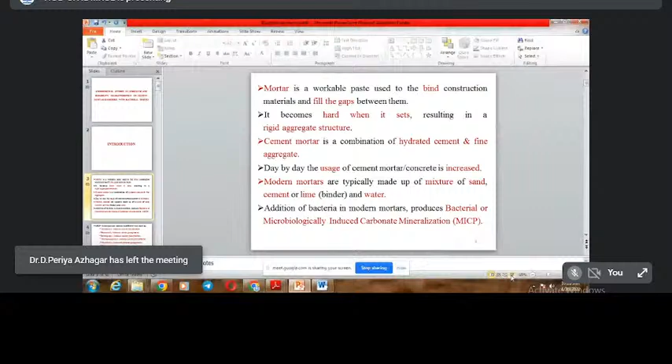Hello madam, now sir, now it's okay, it's coming. Okay madam.

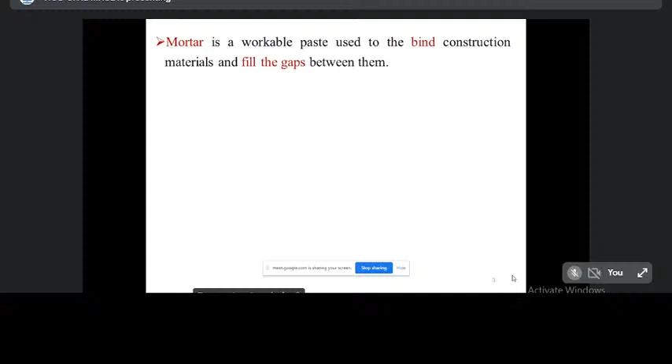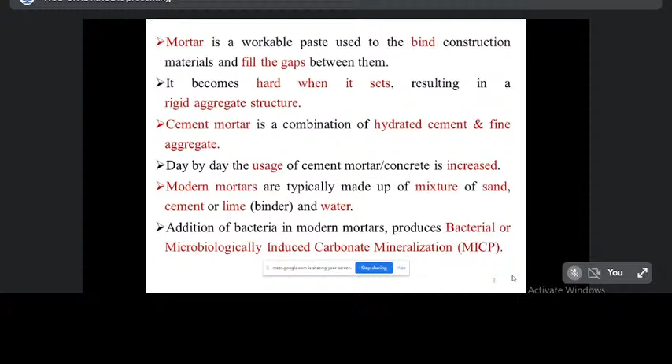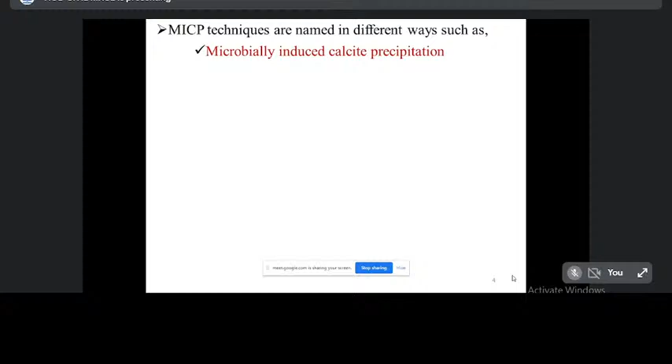The bacteria is added into the cement mortar. It produces microbially induced carbonate mineralization, called MICP. This MICP is called by different names: microbially induced, bacterially induced, microbiologically induced calcite precipitation.

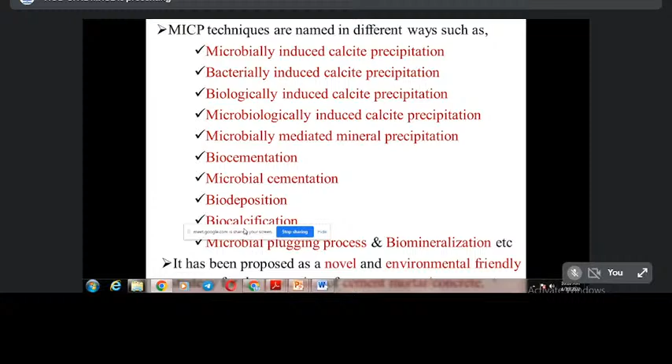Microbially mediated mineral precipitation, biocementation, microbial cementation, biodeposition, biocalcification, microbial plugging process, and biomineralization, among others. The bacteria is introduced in cement mortar, producing MICP, which is called by different names. It has been proposed as a novel and environmentally friendly strategy for the production of cement mortar and concrete.

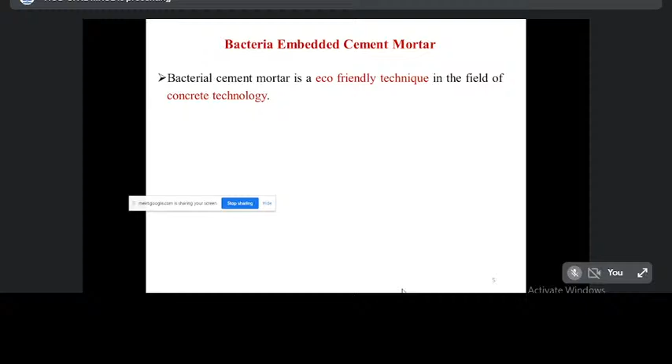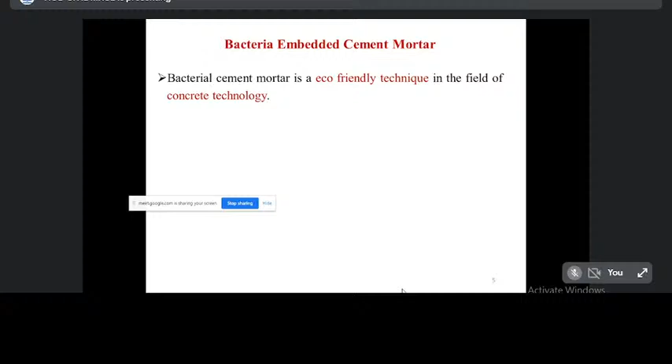What is bacteria embedded cement mortar? Ordinary cement mortar is the mixture of cement and sand with water. In addition to this, we add some bacteria into the cement mortar through the mixing process as well as the curing process. These bacteria produce carbonate, and that cement mortar is called bacteria embedded cement mortar.

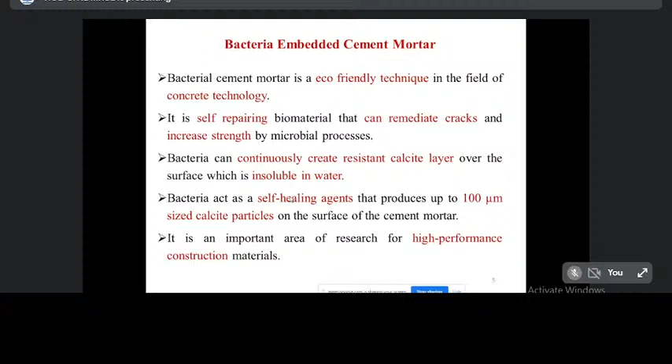The bacteria produce some calcium carbonate that fills the voids between the cement and sand matrix, so automatically the strength and durability characteristics of the cement mortar increase. Bacteria can continuously create a resistant calcite layer over the surface which is insoluble in water. Bacteria act as a self-healing agent that produces up to 100 micrometer sized calcite particles on the surface of the cement mortar. It is an important area of research for high performance construction material.

Then we move to materials, methods, and instrumentation. Materials are nothing but cement and sand. First, Portland Pozzolana cement with brand name ACC was used in this study. It conforms to IS 1489-1991 with specific gravity of 3.1. The photo view shows the ACC cement.

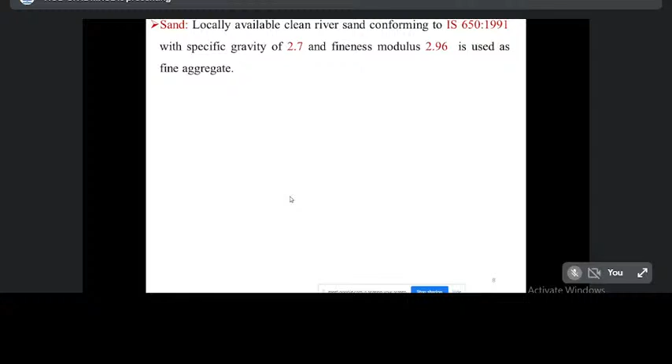The next material is sand. Locally available clean river sand conforming to IS 650-1991, with specific gravity of 2.7 and fineness modulus of 2.96, is used as fine aggregate. I have used 3 types of sand, conforming to Indian standard sand conformation. That means the sand is passed through 2.36mm sieve and retained on 1.18mm.

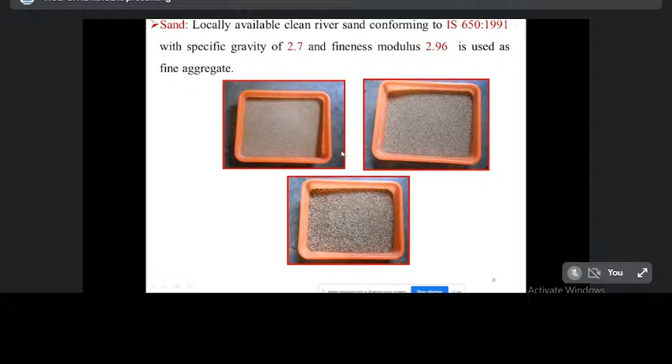Then 1.18mm passed, 700 micron retained sand. Then 700 micron passed, 90 micron retained sand. So 3 varieties of sand: coarse, medium, and fine sand. These 3 types of sand are used in this project as fine aggregate.

These are the bacteria I have used in this research: Enterobacter, designated as FJ973549, denoted as EB1. Then Enterobacter 2, designated as FJ973550. Then Enterococcus and Serratia. This FJ and the numerical value denotes the bacteria designation.

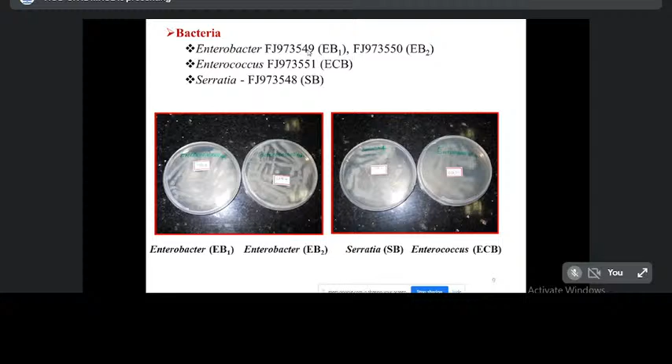This photo view shows the Enterobacter, Enterococcus, and Serratia photo views.

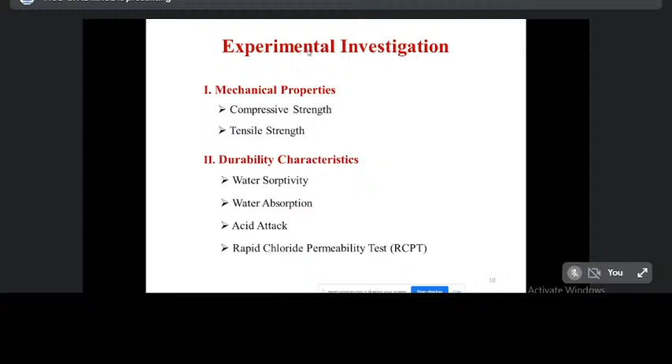My experimental investigation is divided into 2 parts. First part is mechanical properties, which is nothing but compressive strength and tensile strength. Then for durability characteristics, I have performed the following tests: water sorptivity, water absorption, acid attack, and rapid chloride permeability test. These 4 tests I have done.

In addition, these two are B4 broth medium and bacterial culture grown solution. These two solutions are very important. For initial growth of bacteria, I have used B4 broth medium, which is nothing but 0.5% yeast extract, 0.5% glucose, and 1% calcium acetate. This solution is shaken at 30 degrees centigrade for 3 days to multiply the bacterial species.

This is the initial stage. After the bacteria is grown, it is mixed with this bacterial culture grown solution, which is nothing but a combination of 8 gram nutrient broth and 2% urea. These two are common, and then I have changed the 4 calcium sources.

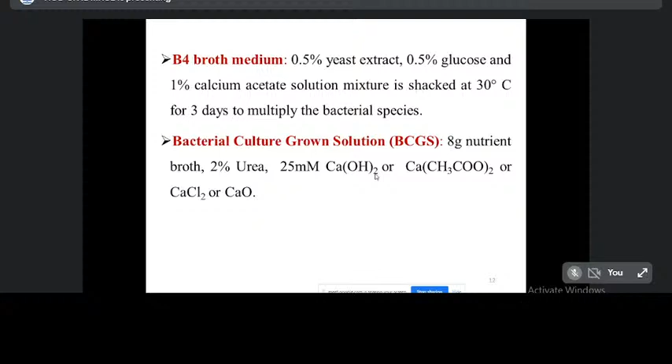First is 25 millimole of calcium hydroxide, then calcium acetate, then calcium chloride, and calcium oxide. The first two chemical components are common; the third one I have changed. Totally, I have prepared 4 combinations of bacterial culture grown solution.

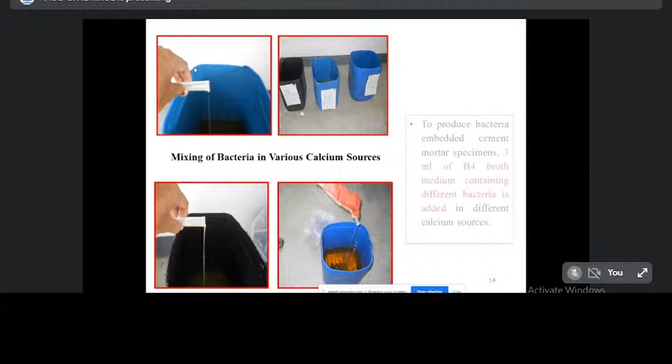Then casting and preparation of the cement mortar specimen. Actually, B4 broth medium consists of grown bacteria, and that grown bacteria contains 3 ml of B4 broth medium.

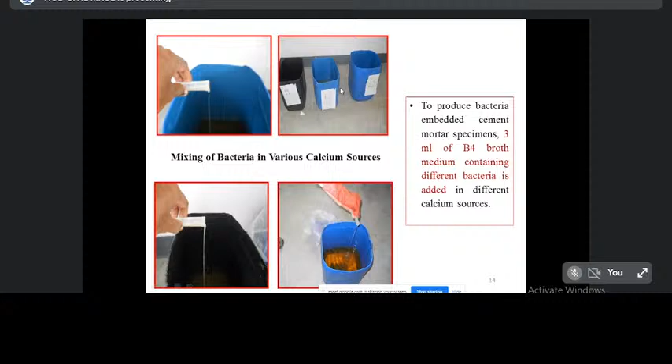I have prepared 4 calcium sources, each stored in a separate container. After that, the well-grown bacteria is mixed with these 4 different types of calcium sources.

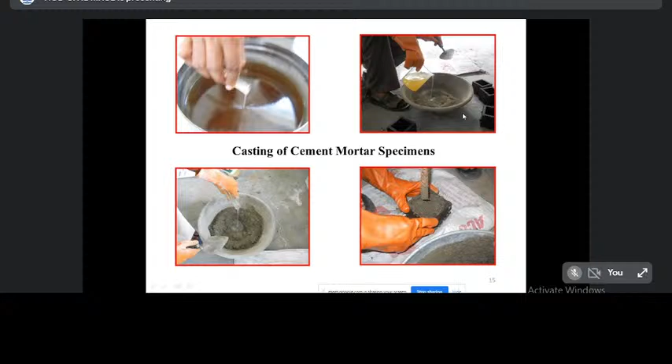This solution is used for mixing as well as curing the cement mortar cube. This is the mixing process, and then this is the casting process. I have used a cement mortar specimen for this study.

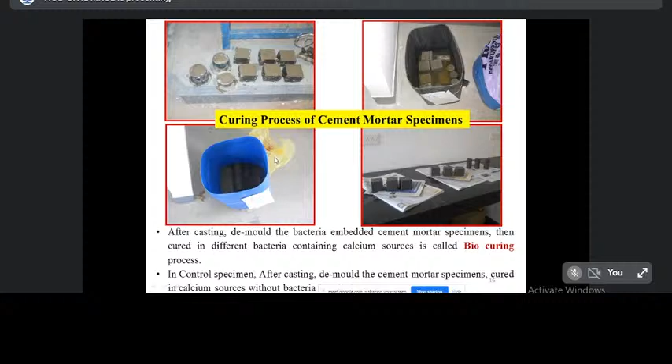Then after demolding, this bacterial cement mortar specimen is cured in the bacterial culture grown solution. This is the curing process. This slide shows the curing process of the cement mortar specimen.

In this study, I have used the following instruments. First is a computerized universal testing machine, which is used to find the compressive and tensile strength of the concrete as well as cement mortar.

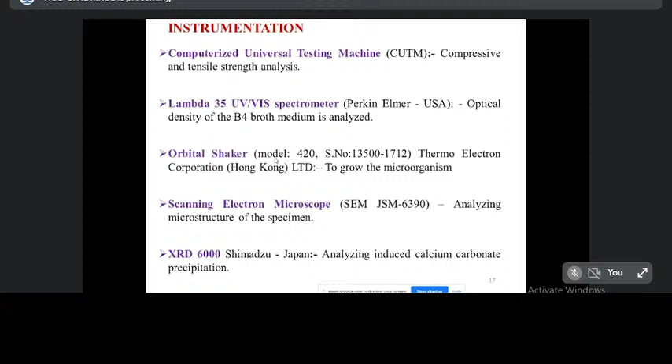Then the Lambda 35 UV visible spectrometer is used to find the optical density of the broth medium. An orbital shaker is used to grow the microorganism. A scanning electron microscope is used to analyze the microstructure of the specimen, and XRD is used to analyze the presence of calcium carbonate in the cement mortar specimen.

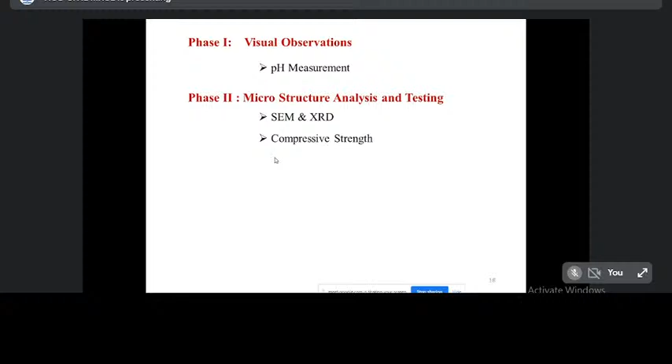The entire work is divided into 2 phases. The first phase is visual observation, meaning I have measured only the pH value of the bacterial culture grown solution. The second phase is microstructure analysis and testing, where I have done SEM and XRD, compressive strength, tensile strength, water sorptivity, water absorption, acid attack, and RCPT test.

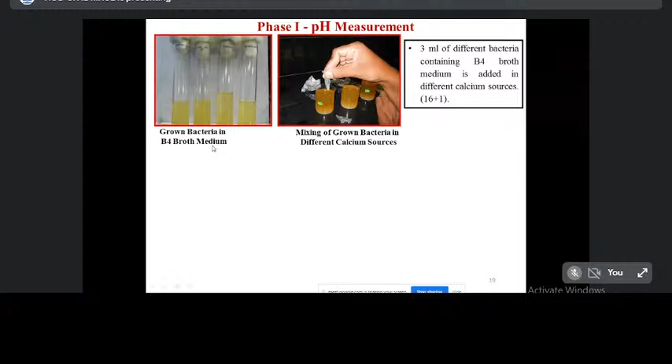The first test is pH measurement. This first slide shows the grown bacteria in B4 broth medium, then mixing of grown bacteria in different calcium sources. The second slide shows the mixing process.

After mixing the B4 broth media of bacteria, after 24 hours, we observed some white deposit on this rod/rib, right? So this is the calcium carbonate.

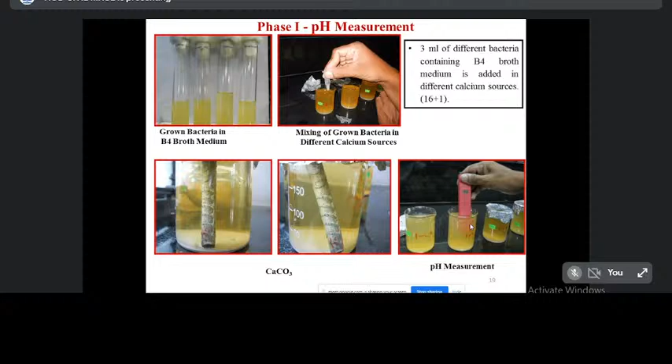After that, I have measured the pH. Actually, bacteria-mixed calcium source shows a higher pH value as compared to the normal solution.

This is the observation: no pH value variation in BCGS, right? The pH variation is constant in the absence of bacteria solution. Increasing pH value in bacteria-contained BCGS1, meaning 8 gram nutrient broth, 2% urea, and 25 millimole calcium hydroxide solution, shows a high pH value due to the enrichment activity of biochemical reaction by the bacteria in BCGS1.

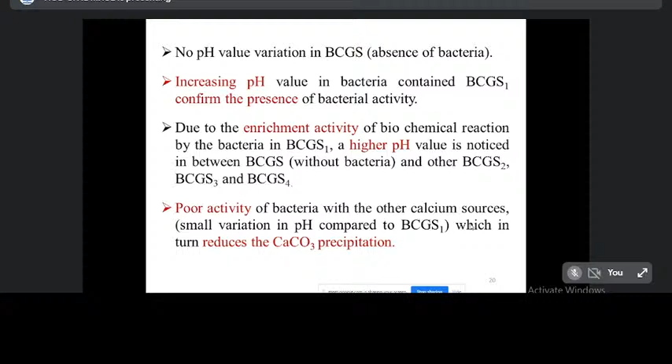A higher pH value is noticed between BCGS without bacteria and the other BCGS2, BCGS3, and BCGS4. Poor activity of bacteria with other calcium sources shows a small variation of pH compared to BCGS1, which in turn reduces the calcium carbonate precipitation.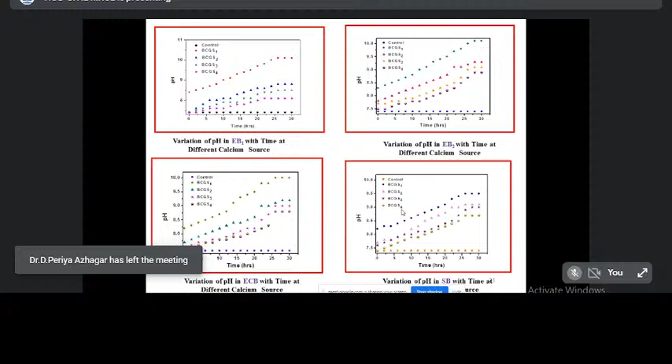Then we move to XRD, which is used to analyze the presence of calcium carbonate. The scanning sample's 2 theta value is 5 to 90 degrees. Induced crystallization characteristic peaks are noticed, such as vaterite, aragonite, and calcite of calcium carbonate, at 2 theta values around 26, 27, 28, 36, 39, 42, 49, and 56 degrees.

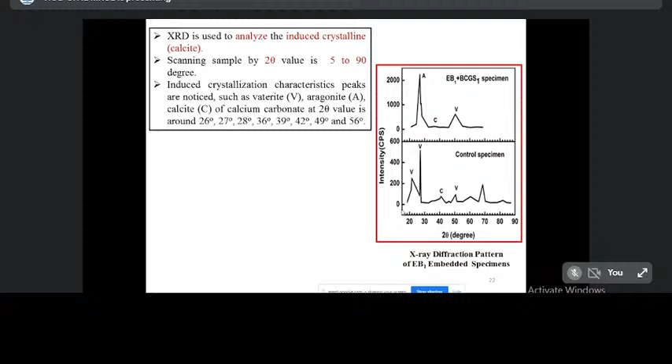In the control specimen, these values correspond to vaterite, calcite, and aragonite. This is the other specimen.

The first slide shows the XRD diffraction pattern of Enterobacter embedded cement mortar specimen. Here, a control specimen shows less peak of 2 theta value, around 500. This EB1, BCGS1 contained specimen shows higher peak value of 2 theta value, nearly 2500.

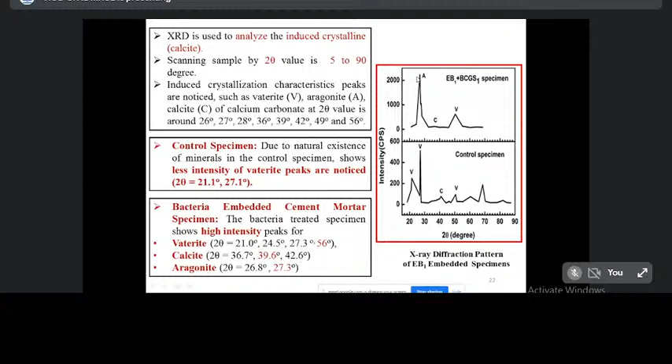Likewise, the XRD diffraction pattern for EB2 embedded cement mortar specimen, ECB embedded cement mortar specimen, and Serratia mixed cement mortar specimen. This theta value shows vaterite observed at 56 degree, calcite observed at 36.7 degree, and aragonite observed at 26.8 and 27.3 degree.

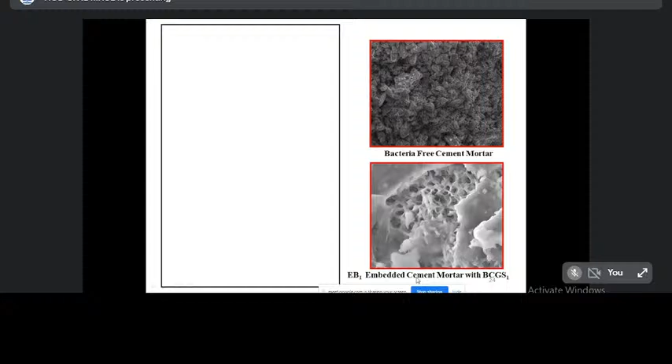Next, we move to the SEM image. This first slide shows the control specimen SEM image. The second photo shows the Enterobacter embedded cement mortar specimen SEM image. Here are the observations.

MICP in the samples are examined through SEM. There is no evidence observed for calcium carbonate precipitation in the control specimen. In the control specimen, there is no calcium carbonate, and no white deposit is observed, but a dense formation of MICP is identified in the microbial cement mortar specimen.

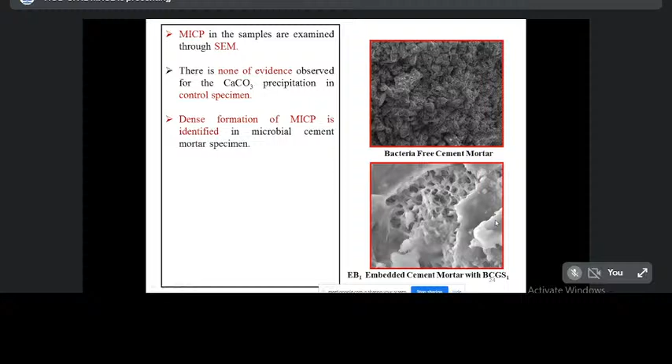The second photo shows the dense formation of white deposit, called calcium carbonate. Because of significant bacterial activity, a clear deposition of white calcium carbonate precipitation is identified in the biocuring cement mortar specimen. This MICP is one of the substantial factors for increasing compressive strength in the bacteria-treated cement mortar specimen.

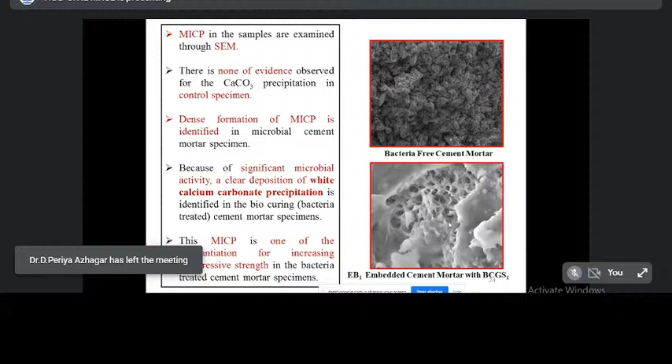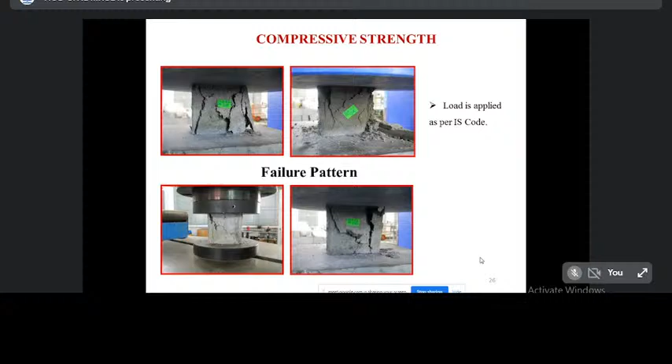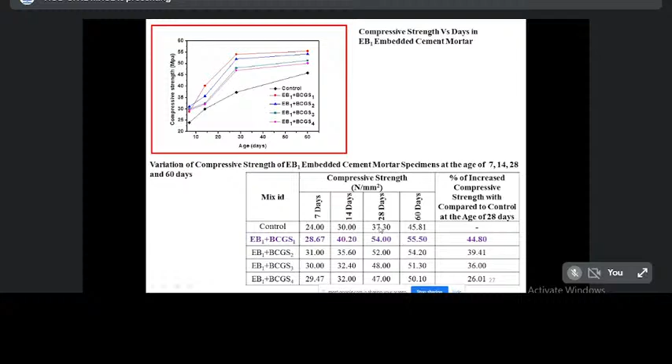Enterobacter embedded with BCGS1 shows 28 day compressive strength of 54. This is the control specimen, 28 day strength is 37.3. Nearly 50% of the value is increased due to the addition of bacteria in the cement mortar specimen.

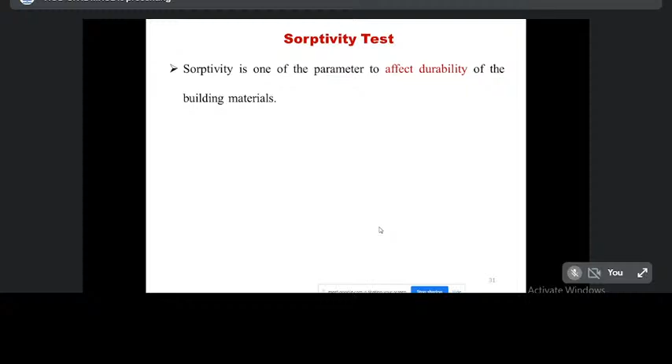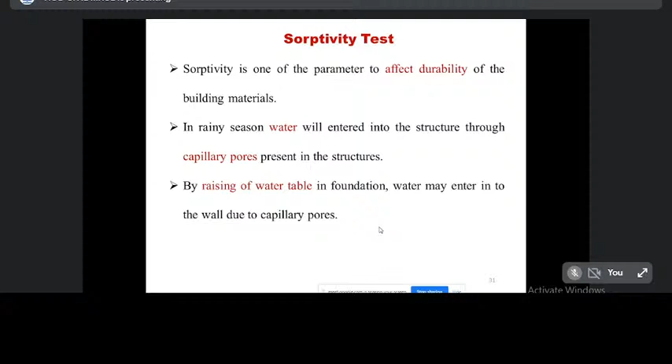Sorptivity is one of the parameters affecting the durability of the concrete structure. Rainwater enters the structure through capillary pores present in it. Rising water table in the foundation, water may enter the wall due to capillary pores. This is the test apparatus of the sorptivity test.

I have used a 50 mm diameter and 100 mm height cylindrical specimen, cast and cured for 28 days. After 28 days, it is dried at 100 degree centigrade in a ventilated oven. Specimens were coated with waterproof resin of ISO 0081 except the top and bottom of the cylindrical specimen to ensure unidirectional absorption of water.

Then the specimen was submerged up to 5 mm height of water. The specimens were removed from the water and weighed after drying the surface with a towel every 15-30 minutes, then at 1.5, 3, 5, 8, 24, 72, 96, 120, 144 and 168 hours. Immediately after each measurement, the test specimens were sunk again into the water.

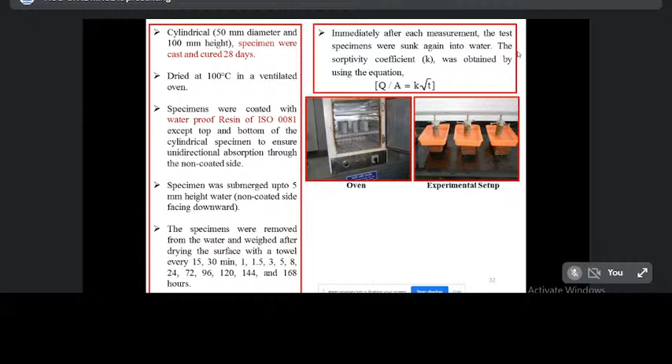The sorptivity coefficient K was obtained using the equation Q/A = K√T. From this observation, this is the sorptivity coefficient of the cement mortar specimen.

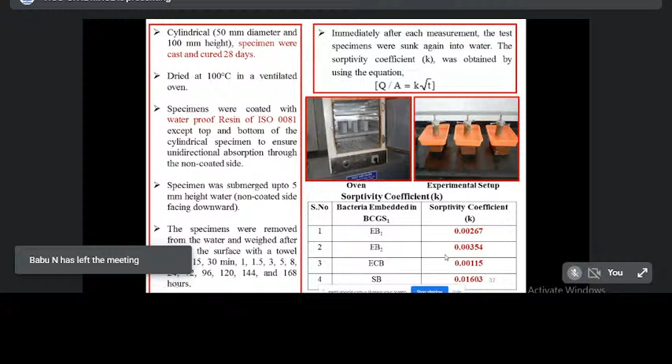This is the EB1 BCGS1 mixed cement mortar specimen. Sorptivity coefficient is 0.00267. This is a very low value. Compared to this, other specimens show somewhat higher sorptivity coefficients.

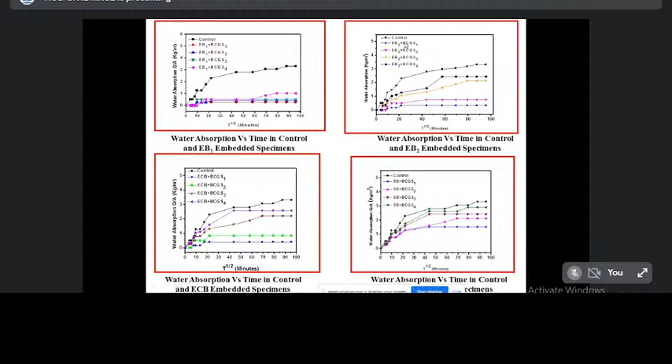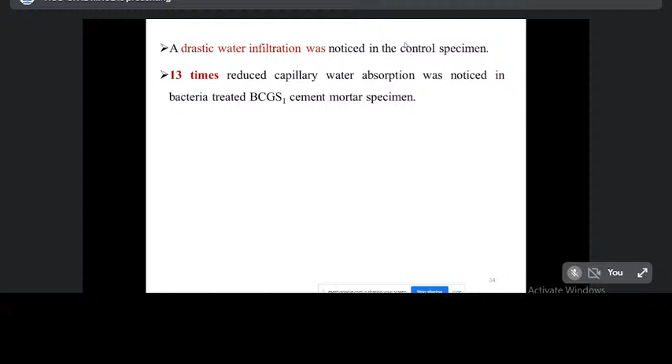From this observation, we derived the following conclusions. First, drastic water infiltration was noticed in the control specimen. Then, 13 times reduced capillary water absorption was noticed in the bacteria-treated BCGS1 specimen, mainly due to the denser interfacial zone formation of calcite precipitation between the cement and sand matrix.

In the biocuring process, the microorganism shows good growth conditions at the calcium hydroxide microenvironment. It produces urease to hydrolyze urea fully, so that the calcite layer is finally precipitated in a gradual manner.

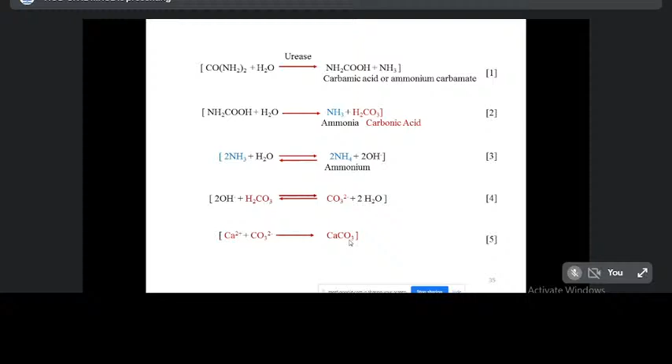This is the chemical formula for formation of calcium carbonate. The bacteria produce urease, which is combined with atmospheric carbon dioxide. Finally, it is converted into calcium carbonate, CaCO3. This is the chemical equation involved in this process.

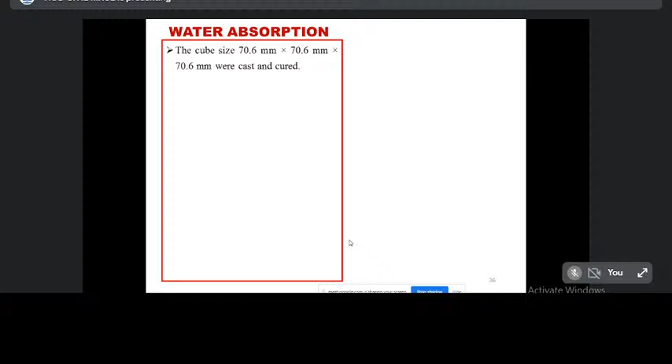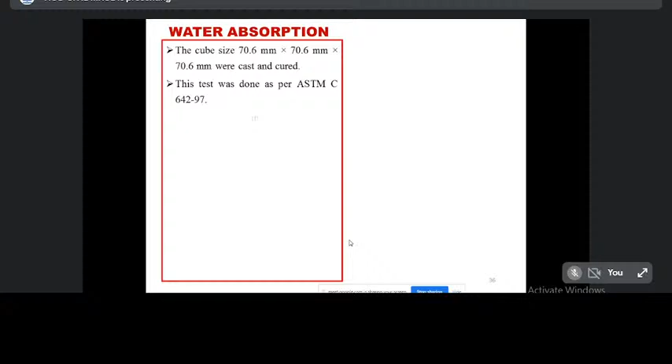Next, we move to water absorption. For this test, I prepared a cement mortar cube of size 70.6 mm by 70.6 mm by 70.6 mm. This test was done as per ASTM C642-97. Then the specimens were dried at 105 degrees centigrade for 48 hours.

Then the initial weight is measured, denoted by W1. The specimen is kept immersed in water continuously for 48 hours. After 48 hours, we measure the final weight, denoted by W2. Then, using this equation, final weight minus initial weight divided by initial weight, multiplied by 100, gives the water absorption percentage of the given specimen.

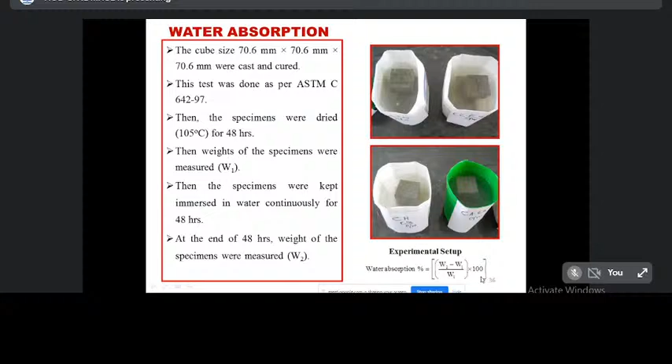This slide shows the water absorption in control as well as microbial cement mortar specimens. The first one is Enterobacter combined with BCGS1. This specimen shows less water absorption compared to the control specimen. The EB1 specimen shows 1.22% water absorption, but the control specimen shows 3.01%.

Likewise, the water absorption for other bacteria is presented in this slide. The second slide shows the EB2 embedded cement mortar specimen. The third bar chart shows the ECB embedded cement mortar specimen. The fourth bar chart shows the Serratia embedded cement mortar specimen.

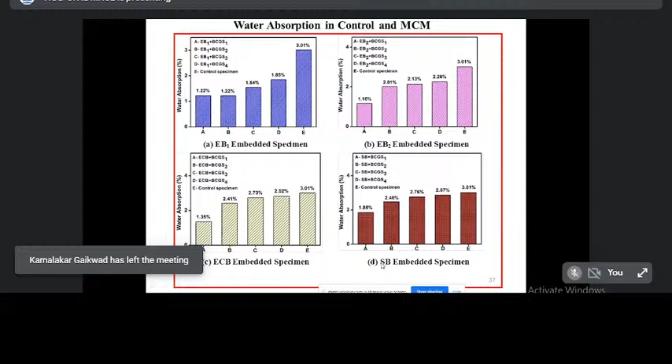Then, acid attack on bacteria embedded cement mortar specimen. For this purpose, I used a cement mortar specimen. The mixing and preparation procedure were done in accordance with IS 4031 Part 6, 2000, following the test procedure of the author Reddy et al.

Acid attack experiments were carried out to analyze the weight loss percentage. The specimens were tested after 28 days. They were dried at 105 degrees centigrade and the initial weight was measured, denoted W1. Then the test specimens were kept in a solution with H2O and HCl in a 1:1 ratio.

I prepared this acid solution, and the initial weighted specimen was immersed in it for 28 days. After 28 days, the specimens were dried at 105 degrees centigrade, and the loss of weight was measured. That measurement is W2.

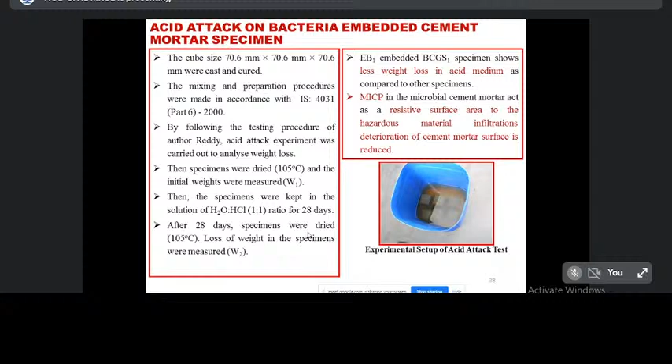The EB1 embedded BCGS1 specimen shows less weight loss in acid medium compared to other specimens. MICP in the microbial cement mortar acts as a resistive surface area against hazardous material infiltration, reducing deterioration of the cement mortar surface. This MICP prevents the penetration of acid into the cement mortar specimen.

This is the formula used to find the acid attack: W2 minus W1, divided by W1, multiplied by 100.

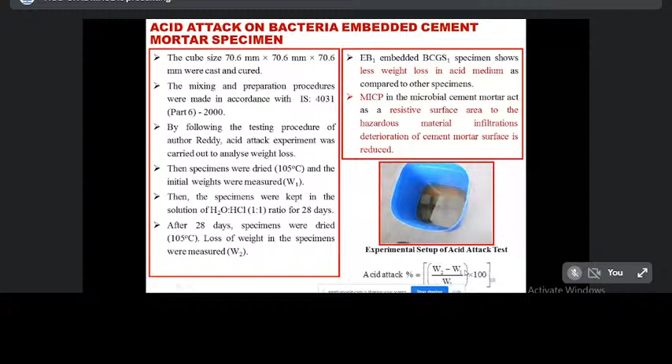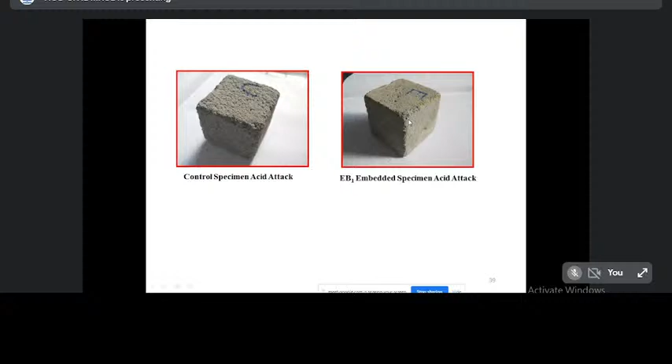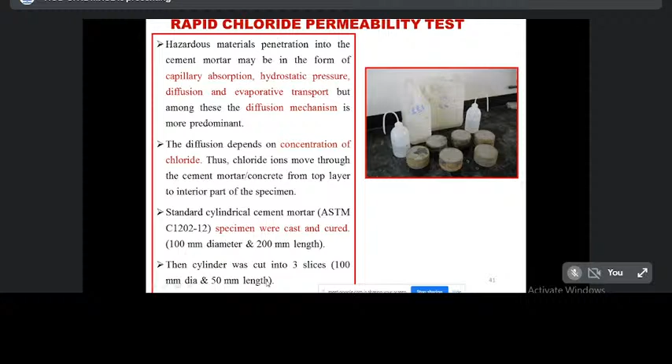The next test is the rapid chloride permeability test. For this purpose, I made a specimen with 100 mm diameter and 200 mm length. This cylindrical specimen is cut into 3 pieces, each of size 100 mm diameter and 50 mm length. This is the experimental setup.

Actually, this is the specimen. One side of the specimen, we used 0.3 normality NaOH, which is connected to the positive terminal. The next end is embedded with 3% NaCl, connected with the negative terminal of the voltage meter. A constant 60 volts is passed through this specimen.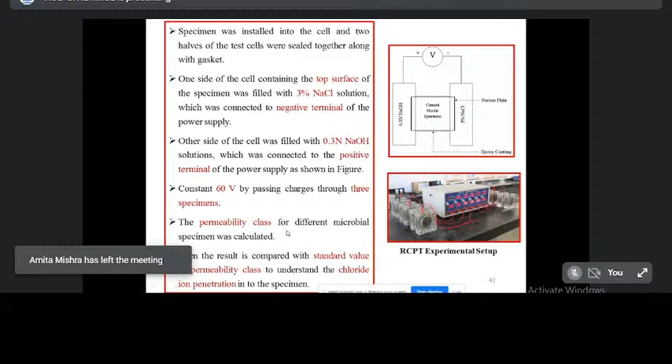The permeability class for different microbial specimens was calculated. Then the result is compared with the standard value of permeability class to understand the chloride ion penetration into the cement mortar specimen.

From this test, we concluded that due to the presence of pores and voids, the control specimen permits a flow charge of around 1766 coulombs. But the specimens embedded with EB1, EB2, ECB and Serratia with BCGS1 permit 397, 436, 455 and 467 coulombs respectively. Compared to control, this value is very less, mainly due to the formation of MICP in the pores and voids which resists the flow charge.

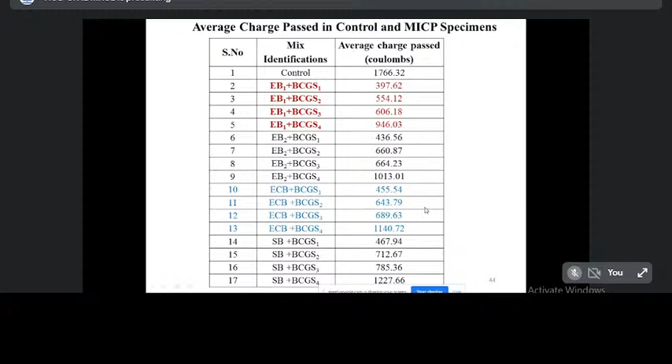This table shows the average charge passed in control as well as the MICP specimens. EB1 BCGS1, S2, S3, S4 specimens show less charge flow compared to control. Likewise, EB2 BCGS1, S2, S3, S4 shows a higher value compared to EB1. Likewise, ECB and Serratia flow charges are denoted in this table.

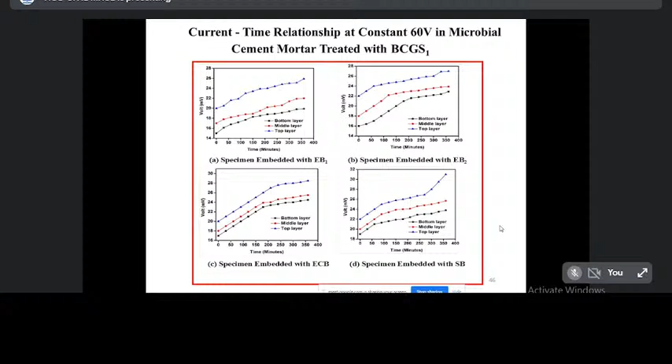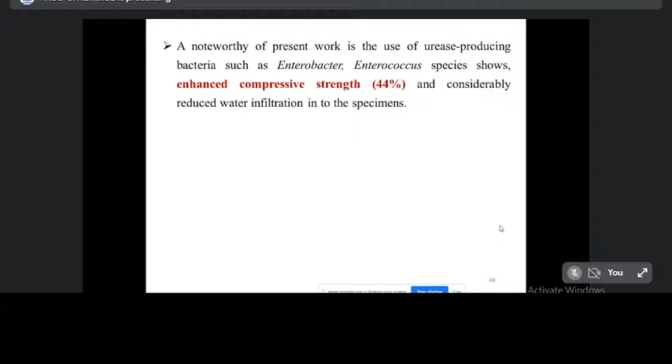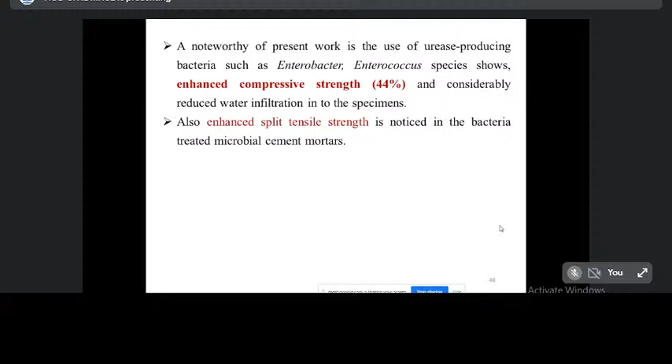Next, we move to the conclusion. From this study, we concluded the following points. A noteworthy aspect of the present work is the use of urease-producing bacteria such as Enterobacter and Enterococcus species, which enhance compressive strength up to 44% and considerably reduce water infiltration in the specimen. Also, enhanced split tensile strength is noticed in the bacteria-treated microbial cement mortar.

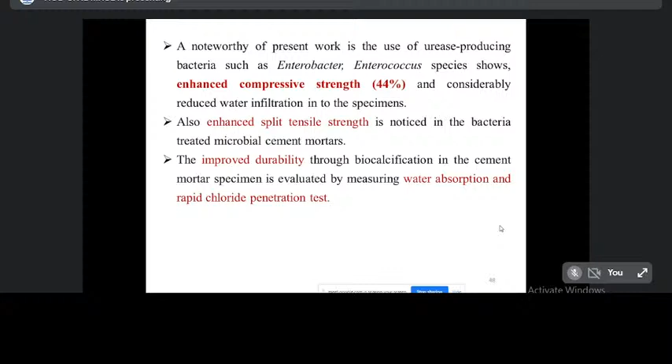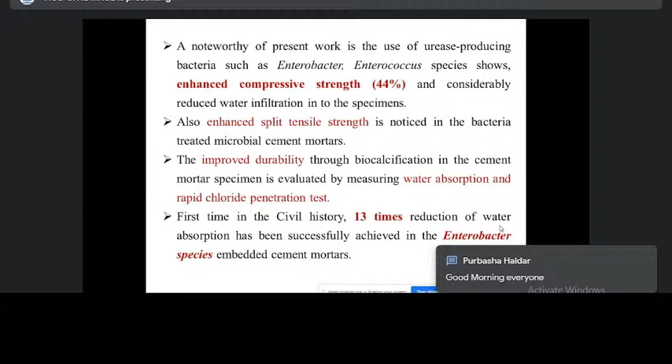The improved durability through biocalcification in the cement mortar specimen is evaluated by measuring water absorption and rapid chloride ion penetration test. For the first time in civil history, a 13-fold reduction of water absorption has been successfully achieved in the Enterobacter species embedded cement mortar specimen.

From the RCP test, the reduction in charge value indicates better resistance to chloride ion penetration and lower permeability of the microbial cement mortars. This microbial technique will provide the basis for an alternative high quality cement mortar specimen sealant. It is environmentally safe and will eventually enhance the strength and durability properties of the building material.

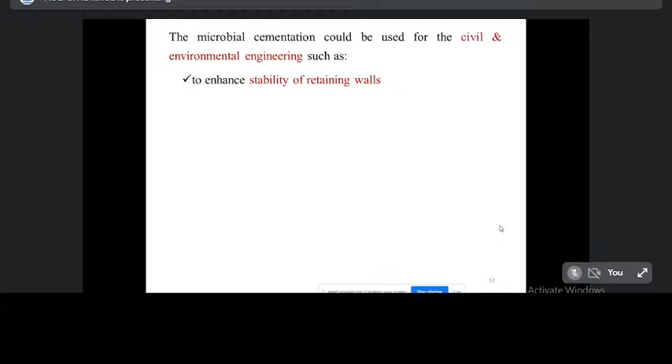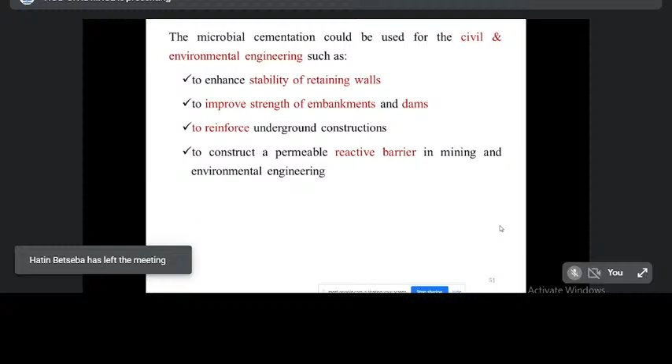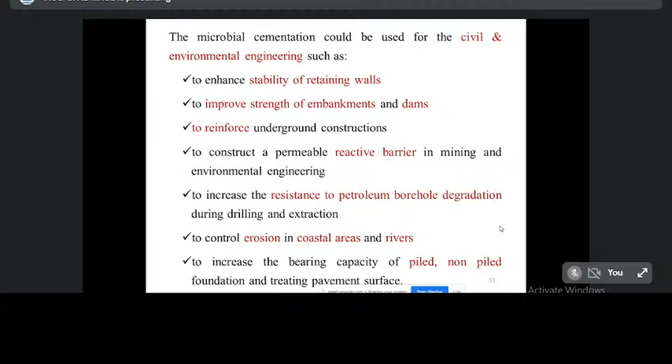This methodology is used in the following applications. Microbial cementation can be used for civil and environmental engineering applications: to enhance the stability of retaining walls and improve the strength of embankments and dams, to reinforce underground construction, to construct permeable reactive barriers in mining and environmental engineering, to increase resistance to petroleum borehole degradation during drilling and extraction, to control erosion in coastal areas and rivers, and also in piled and non-piled foundations for treating pavement surfaces.

We know about cement mortar, which is nothing but a mixture of cement and sand mixed with some water. To improve the compressive strength or durability properties of the cement mortar, we induce some bacteria. That bacteria produces urease.

Urease is combined with atmospheric CO2, and it reacts to finally produce calcium carbonate. This calcium carbonate fills the voids present in the cement mortar as well as concrete, automatically increasing its mechanical properties as well as durability properties. This is the main concept presented in this study.

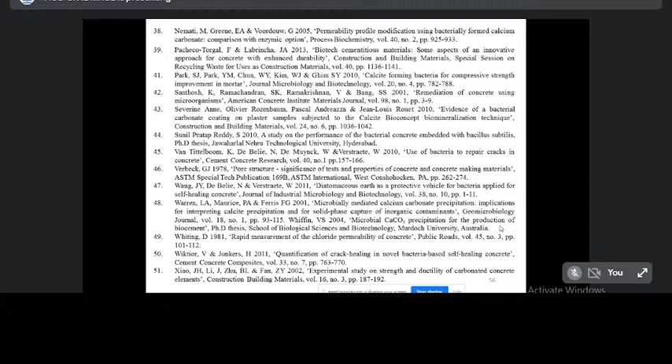We identify the urease-producing bacteria. That bacteria produces urease, which reacts with atmospheric CO2, and finally produces calcium carbonate. That calcium carbonate fills the voids between the cement-sand matrix, so automatically our mechanical properties as well as durability properties of the cement mortar specimen are increased.

The formation of calcium carbonate is identified from two tests. One is the SEM test, where we observed a white deposit. As per literature, this is identified as calcium carbonate, and the SEM test confirms this white deposit is calcium carbonate.

This calcium carbonate is confirmed with the XRD test. XRD produces a 2-theta value, which corresponds to vaterite, aragonite, and calcite. So calcium carbonate is present in three forms: vaterite, aragonite, and calcite. From this microstructure analysis, I have concluded that the white deposit is calcium carbonate.